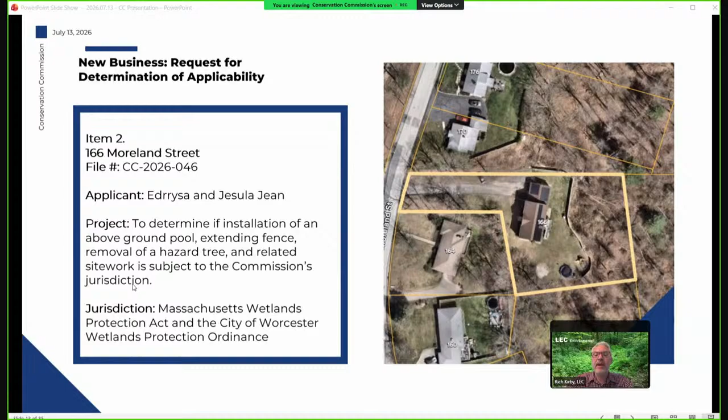Go ahead. I'm representing the owners of 166 Moreland, as depicted here in the image. And I do have the sketch plan ready to go. If I could share my screen, or you can do it there. Perfect.

Jesula and Edrrysa Jean would like to install an above-ground pool in the side yard of the property. This is a view of the sketch plan. It's a limited frontage lot with a driveway that extends easterly from Moreland Street and accesses the single-family house with the attached garage. There are bordering vegetated wetlands in the back, denoted with the orange line there.

LEC flagged those a couple of years ago. The approximate 15-foot no-alteration zone is the red line. The house is surrounded by lawn and landscaped plantings. The pool is proposed on the side of the house, shown as the blue rectangle. There's also a pool deck proposed on the west side of the pool.

The pool itself is 16 by 32, above ground, and the deck would be 10 by 16, again on the west side. The side yard has a bit of a grade to it, and of course the pool needs to be installed on relatively flat land. So what they'll do is take the higher ground, to the left or west, and grade it flat, pushing that material to the east to infill the lower ground, thereby making a relatively flat surface to accommodate the proposed pool.

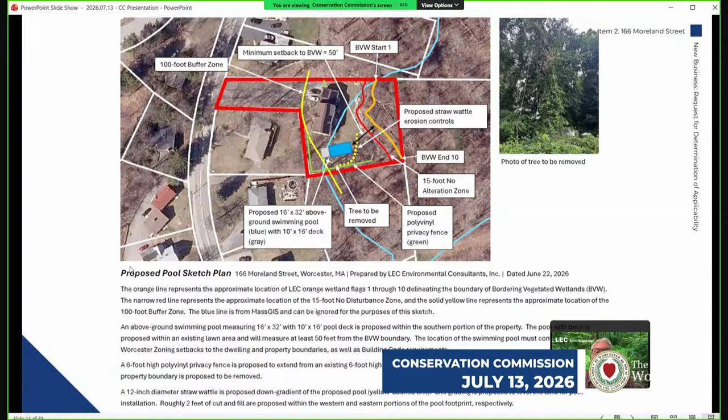That is a great question. There is limited space if you look on the driveway as you come down, and if the machinery were to turn right in front of the house, there is space to get a small sort of Bobcat-type machine through there. I can't imagine they're going to need anything significantly larger than that, but if you wanted to condition that only small machinery be used to move the soil around to create the flat area for the pool, I think that would be just fine.

Okay, and then I know you're addressing the dewatering, but are there specific instructions or methodologies for draining the pool, should it be necessary? It's hard to imagine them draining it in any way that wouldn't impact the wetlands because they're surrounded.

Sure, also a good question. In our experience, the chlorine used in these pool systems, if you don't add it for several days or a week, depending on how sunny it is, dissipates, and the chlorine levels drop pretty significantly. At that point, it would be safe to dewater the pool. And really, at that point, all you're concerned about is erosion.

So a slow release of the water. You could also put down a piece of plywood or something to dissipate the velocity as it flows over land. The water is going to travel toward the wetland to the east regardless of where you put it on this property, because the entire property slopes in that direction. But usually, if you are going to lower the level of the pool, it's going to be at the end of the season, and at that point, you've stopped adding chlorine, and the water is relatively chlorine-free.

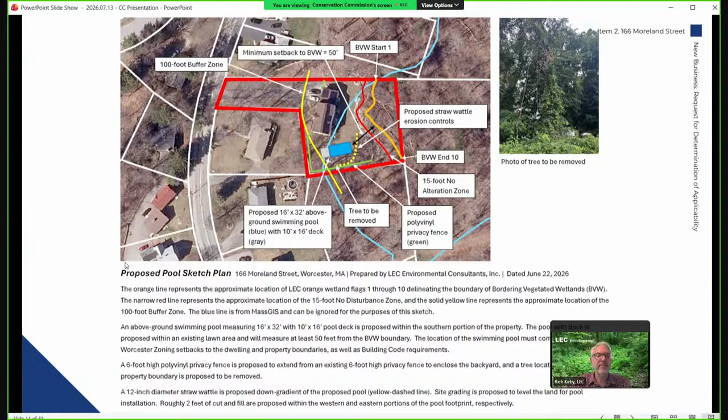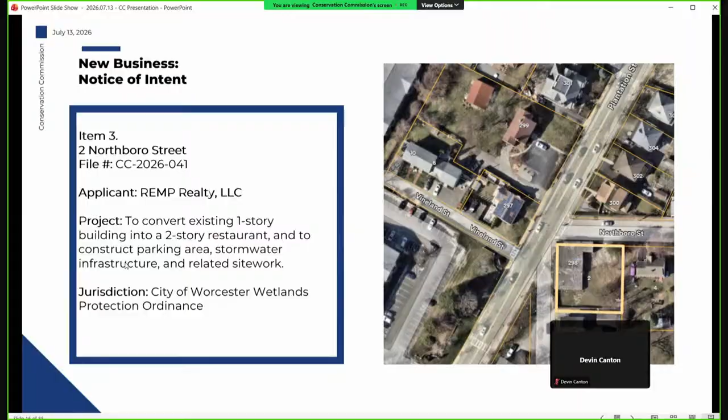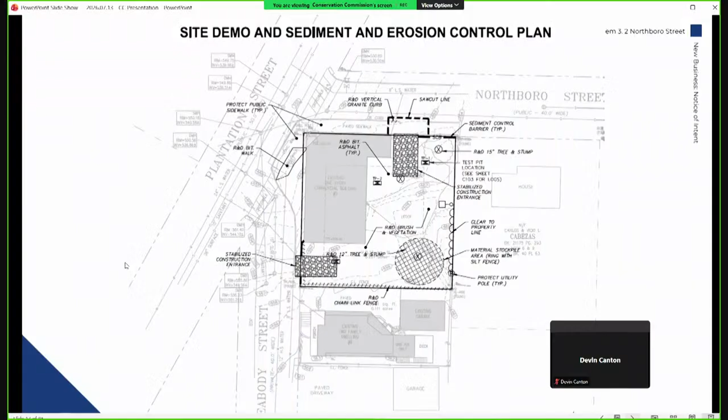Good evening, Mike Andrade with Graves Engineering. With me also tonight is Mr. Rod Haddad, owner of the subject property. So we're here before you on a piece of land on the corner of Northboro, Peabody, and Plantation. It's an existing quarter acre property with a 1-story, 3,000 square foot building on it.

The project proposes to renovate the entire site and building, adding a second story, renovating the site to add new curb cuts, parking, lighting, landscaping, and stormwater management, to house Mr. Haddad's Napoli Deli business, which is currently operating in Shrewsbury.

The property's been in his family for many years. It was previously a dry cleaner operation, closed for a decade or decades or so, I think - the dry cleaner's been closed for a long time. Well, it was a satellite, they only did shirts and laundry on the premises. Not that important, but it's been not open. I apologize, thank you, Rod. It's been closed and vacant for some time.

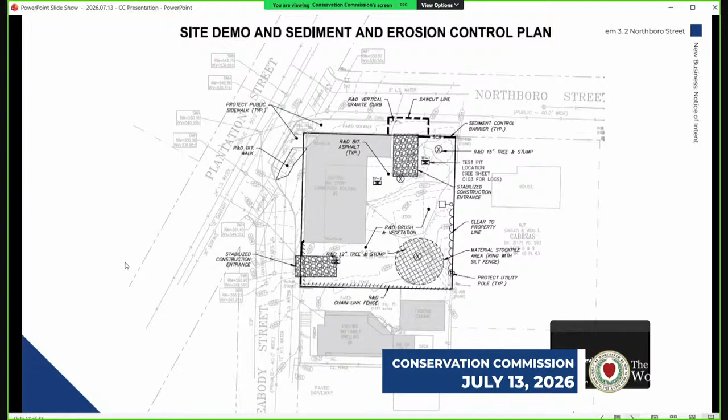There's been, in past years, several attempts by Mr. Haddad to get this project off the ground with different iterations that weren't successful due to contractor issues. But we're here tonight to propose this project to the commission under the local wetlands protection ordinance. We've been through zoning board already and have those approvals, so we're seeking commission's approval and then planning board Wednesday night. I'll take any questions anyone has.

Thank you. Okay, thank you. Staff comments? So this is a local-only filing, no wetlands associated with the property, but it's within 100 feet of a catch basin over on Peabody Street. Staff had relatively minor comments - we did have questions about the ledge on site, which was answered in the response. Essentially, the stormwater system is designed with knowledge that there is ledge on this site and is designed to provide the required recharge volume. So no major concerns from staff at this point.

Okay, commissioners, questions or comments about the project?

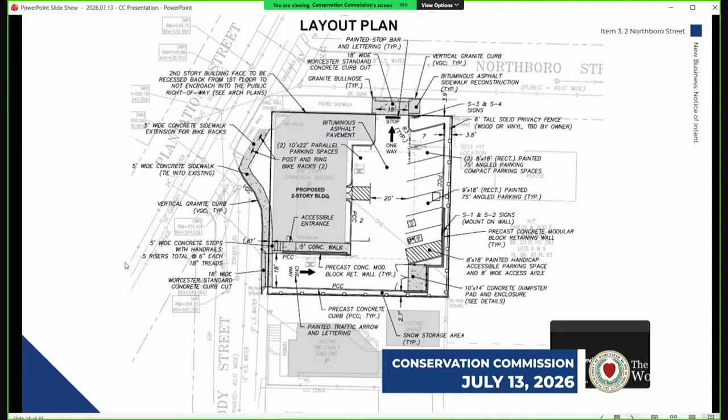The site's relatively flat, not actually. The high point is in the bottom right corner, where we're proposing a stockpile. That's the high point. It slopes down to Peabody Street and then slopes down to Northboro Street. Right now there's an existing parking lot off Northboro Street where the stabilized entrance is. That's the only real flat part besides the building. So the current water is sheeting towards the street.

So the parking lot will roughly follow existing contours. We have to cut into it a little bit. We're collecting all that water in two points: one near Northboro Street with a catch basin that goes to a treatment unit in the underground recharge system, and a small portion of the parking driveway on the south side of the building goes to another catch basin treatment unit and out to Peabody Street.

So you're not doing much to change the contours of the property from the current, other than that? In the back corner we are, and actually there's a retaining wall necessary in order to do that grading, but we're trying not to. We're aware there's ledge there, so we were very careful about that with the grading to try to minimize ledge removal.

Okay, I don't have additional questions. Is there anyone from the public on the project? Online?

Is there a motion? Motion to close. Commissioner Canton? Second. Commissioner Canton, aye. Commissioner Kirschner? Sorry, I was muted. Aye. Commissioner Nystrom? Aye. Commissioner Fertoni, aye.

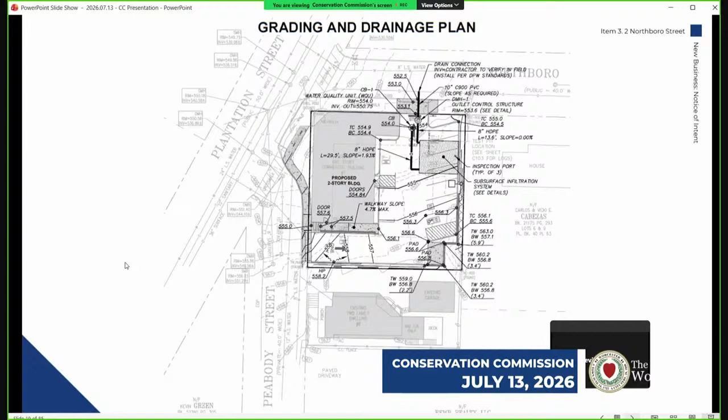If you can unmute Andrew Keel, he's going to kick us off. You could introduce yourself in the meantime. Sure, he was going to do all the intros, but Andrea Kendall with LEC, Environmental Consultants. Did you receive that presentation that we sent late in the day? Okay, great, thanks.

Hi everyone, I'm Andrew Keel with Hatch. We are the design consultant for the Lake Park Site Improvements Project. The client is the DCR. The DCR project manager, Joey Silvera, is also on this call. And then the permitting consultant for this project is LEC, and Andrea is sitting in front of you there.

The goals of this project, quickly: it's a two-phase project. What we've submitted to you tonight is phase one. The ultimate goal is to permanently close the inaccessible swimming beach currently at Lake Quinsigamond and replace it with a safer, reimagined lakefront overlook experience. The first phase would still have a water element redirected up to the parking lot in the form of a spray deck, paired with a playground, and a more family-friendly, safer, more universally accessible space at the top where the parking lot is currently, adjacent to the bathhouse.

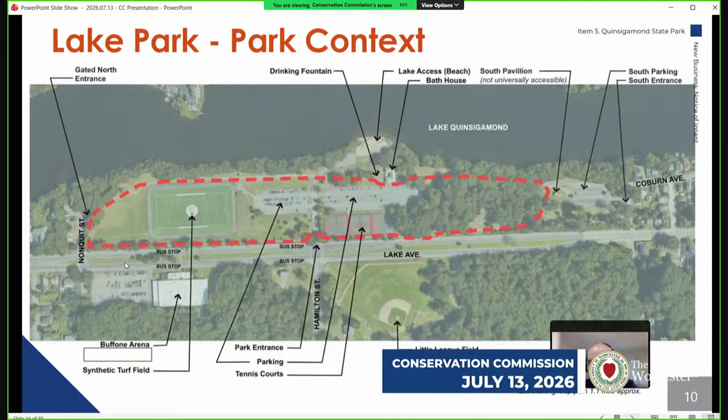So here are the two phases I was just mentioning. Phase two has a bit more to it. It made sense to break them into two phases. Also, financially, DCR is trying to do as much as they can but bite this off in pieces. Phase one is outlined in yellow—the lower, south end portion of the parking lot, immediately adjacent to the bathhouse. You can see there's a little piece that extends down to Lake Ave that would be a smaller secondary pathway connecting Lake Avenue parking with these improvements as well. Go to the next slide.

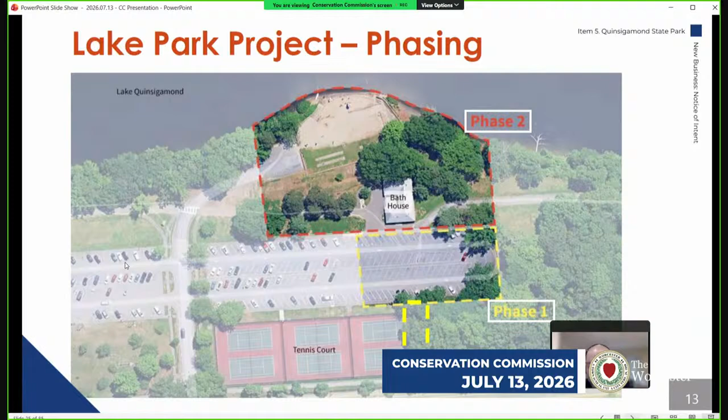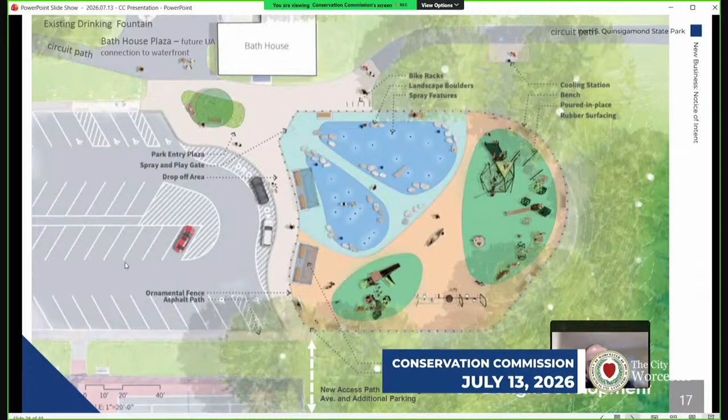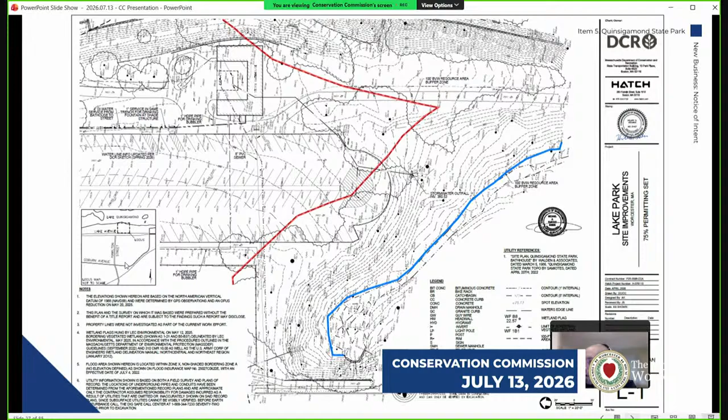Andrea's going to talk about the resource areas and where they overlap on the existing conditions plan. The area confined in blue is the bank of an intermittent stream. There's a stream that flows onto the property from the city's Lake Park, located planned south of here. It flows planned north through a narrow stream channel, then further right opens up into more of an open water BVW system, and exits through a raised grate culvert system, which has some function of flood control, discharging through a pipe conveyance system to Lake Quinsigamond.

The 100-foot buffer zone is in red, and that buffer zone includes the upland forested slope, some lawn area, an existing drainage outfall to the right of the circular tip, and some of the parking lot. There's also the stormwater protection zone.

That intermittent stream, confirmed through StreamStats, has a 0.18 square mile watershed. There is no floodplain associated with the site. In terms of vegetation, it's a mix of native and non-native species, which comes into play a little later - we included a list of that, and Andrew's going to get into that in more detail.

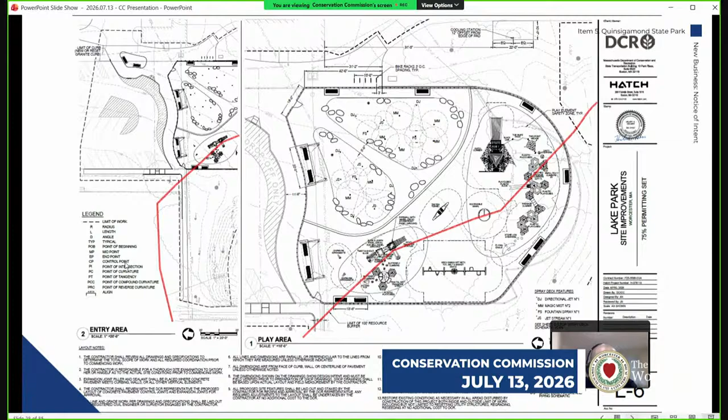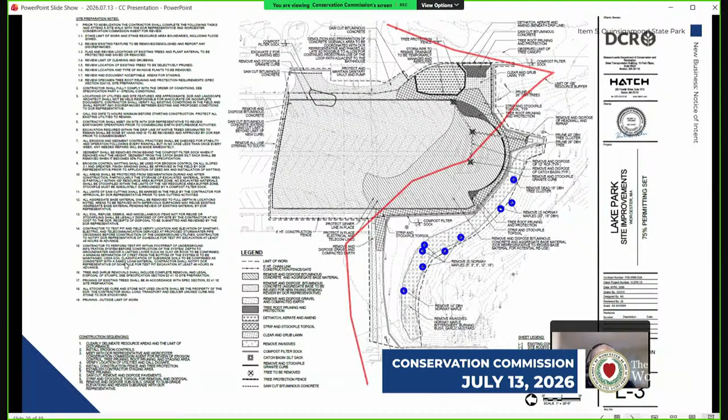We can go on to the next slide.

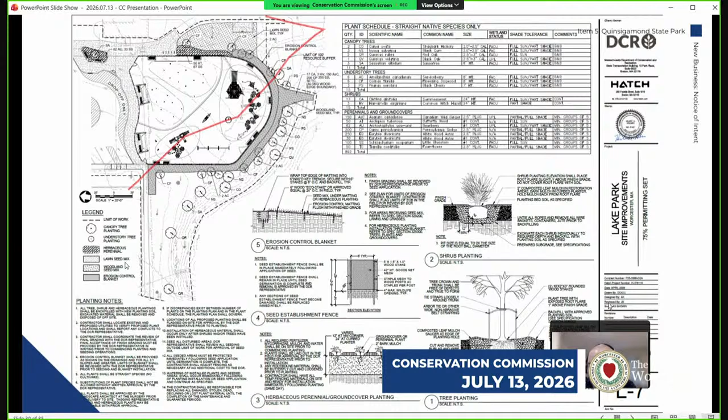What we're proposing is basically to replace that in the exact location it is now, so it's almost more of a repair, limiting disturbance as much as we can. Unfortunately, the pipe size currently there is not adequate by today's Massachusetts standards, so we do have to replace the pipe and the head wall. But because we're doing it in a location that already exists, we can really minimize disturbance along that corridor.

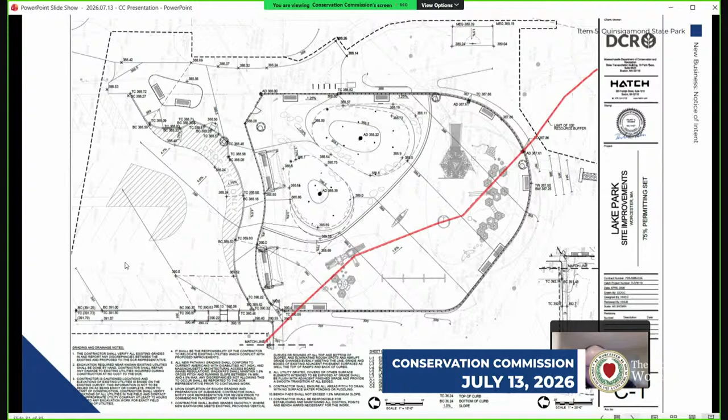We can go to the next slide. This is the drainage improvement slide. Hillary Holmes is our stormwater engineer on this project. She's going to talk briefly about the stormwater approach.

Hi, Hillary Holmes with Hatch. As Andrew mentioned, the existing parking lot and surrounding area has a couple catch basins with piping that goes to that outfall. There's really no existing treatment or infiltration happening on site. So part of our proposed compliance for stormwater is to comply with the Mass DEP stormwater standards and DCR's redevelopment and water quality treatment requirements.

Our approach is to retain 0.8 inches times the impervious area, have our proposed peak flows less than our pre-development peak flows, and reduce the total suspended solids by 80%. This project is also within DCR's priority watershed, so the intent is to maximize stormwater treatment and pollutant removal. There's a TMDL for total phosphorus reduction, with no specific target, so we are targeting to remove as much phosphorus as possible.

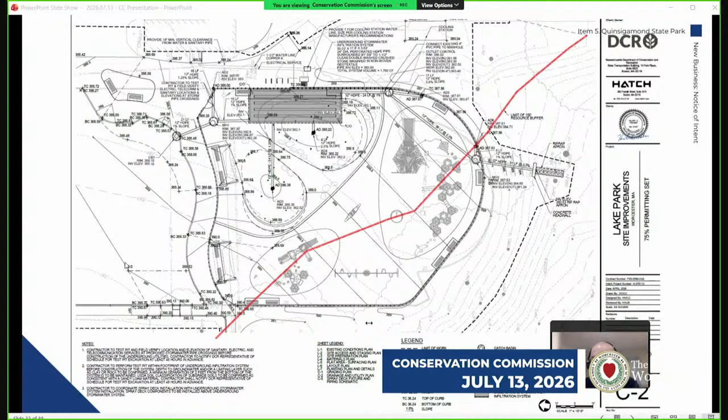Motion to continue the hearing to August 3rd. Second. Commissioner Canton, aye. Commissioner Kirschner, aye. Commissioner Nystrom, aye. Commissioner Fatoni, aye. Okay, thank you.

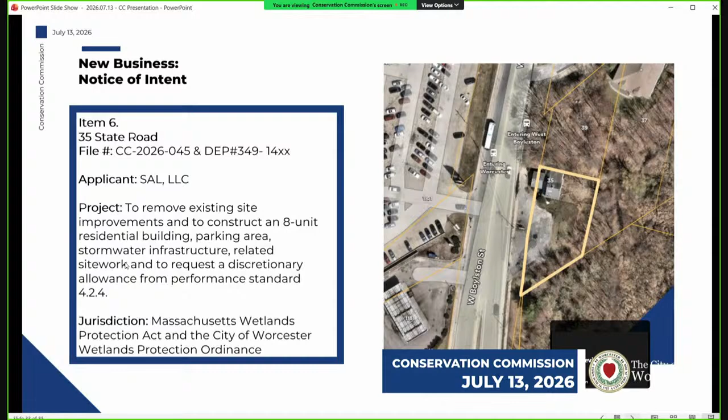Good evening, I'm Paul Linkarski, my wife Susan, the owners of the property. Today existing is a small two-story retail building which we've owned for some 30-something years. Our plan is to remove that building and build 8 one-bedroom units, with 16 parking spots in compliance with Worcester's zoning. Today there's approximately 14 existing spots.

The existing building today is on a septic system; we will be going onto the sewer system. We do have city water. We will be eliminating gas service to the property under Worcester's stretch code for compliance with the type of building it has to be. We will be putting in underground water retention for the parking lot and the roof drain system, plus accessory landscaping, etc. That's pretty much it.

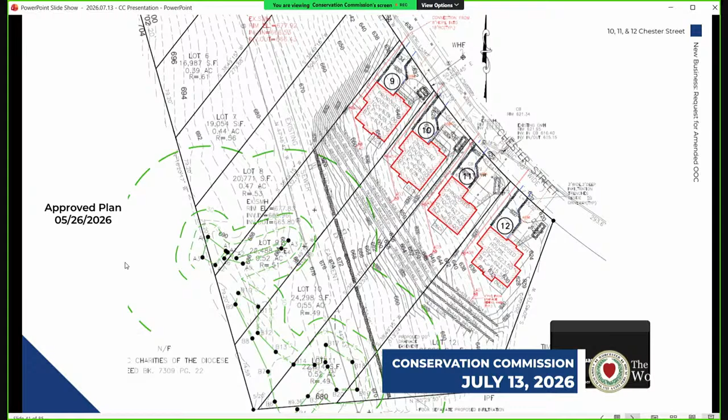So what we have before you now is a plan dated - I have to go check - May 26, 2026, which we would ask to be referred to in the order. I could just sum up quickly a couple of the differences. As part of the review the director of engineering did, he asked us to have a geotechnical engineer opine as to the stability of the slopes behind these lots.

That geotechnical engineer took some samples and said you would want to have a slope of at least 2.6 to 1 or flatter to be able to say that you were going to not have any issue, according to the standard methodology and calculations, with any of the 6 different modes of failure that were looked at. So the plans now show a 2.8 to 1 slope behind these lots.

We actually made the backyard a little smaller on a couple of them to fit that in there. There's still some retaining wall, particularly on the northmost lot, number 9. And we had another engineer stamp plans for that.

In its basics, it's not so very different a plan from that which the commission previously reviewed, but a lot of the minor specifics, exactly what the slope is, exactly the extent of walls, et cetera, are different. We're just asking that the commission please amend the order to now refer to this plan dated May 26th.

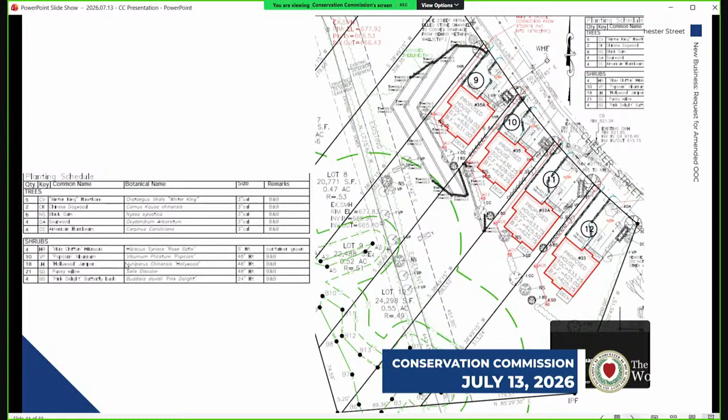Yeah, I mean, I think we'd certainly recommend additional plantings within the buffer zone as much as possible on that hillside, just because of the loss of tree canopy that's there, in addition to wildlife habitat. I think one of the main things here would be to help prevent erosion. I would think also it would be beneficial to the down gradient structures to have more vegetation between these wetlands and their properties, to have additional attenuation of runoff down the hillside.

But yeah, I guess from a regulatory standpoint, no major concerns with the amendment request. Okay, thank you. Commissioners, any questions, comments, or concerns?

If I could jump in, I was consulting with the applicant, and he suggested, towards the end that Eric is pointing, having different ground cover, ivies, et cetera, planted on that slope to help out. They certainly have no objection to any condition calling for that.

My concern is for the runoff to the street during the construction process, how you're going to control it. I assume that you'll go in and clear cut the entire hillside and then start making your cuts and grade changes. You will have a construction entrance, you'll have equipment coming and going, and even if you have erosion control along the downside.

We actually added, I don't remember where in the process this came in, the interim grading plans, which are calling for, even if over that entire limit of work trees are cut, that, for instance at the start, the stumps would be left in place and a temporary settling basin created at the upper lots.

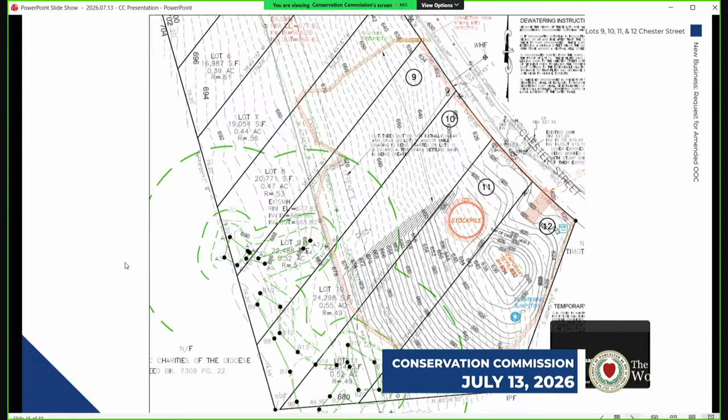What's your time frame for this project? We're hoping to get the first 4 houses done, hopefully by the beginning of next summer. So from the time you clear cut the lot, what's the timing until the lot is finished? Normally it takes us 6 months to do from lot clearing to the finished house, per house.

And then the slope is stabilized or seeded with currently just a grass mix? Yeah, and seasonally, if there's an area that's open and can't be vegetated through winter, we'd apply cover, like stump grindings, as the preferred temporary mulching stabilization. You'll really mulch it. That's the best thing.

And you're local? Yes. Okay, so you can respond on this site? Are you the general contractor for the project, or are you? Yeah, I am the general contractor for the project. So you're responsible for all of this? Yes.

Okay, I don't have any additional questions. Is there anyone here from the public?

Just going back to the slopes question quickly, I think you call out on the plans erosion control matting, correct? Is that during construction? Yeah, even though at 2.6 to 1, or 2.8 to 1, we're almost to the point where DEP would say you don't need it, we're still proposing that be North American Green SC 150BN matting.

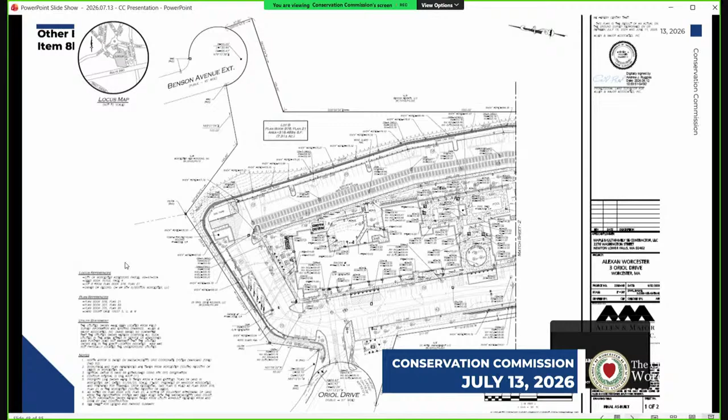Next up, request for certificate of compliance, 3 Oriol Drive. This is for a large apartment complex that was constructed; it was a local-only filing, and there were no wetlands associated with the property. Staff conducted a site visit last Friday and confirmed the site is fully stabilized. An as-built plan has been provided, along with a letter from an engineer confirming the retaining wall and infiltration units have been constructed according to the approved plans. So no concern from staff with issuing a certificate of compliance for this site.

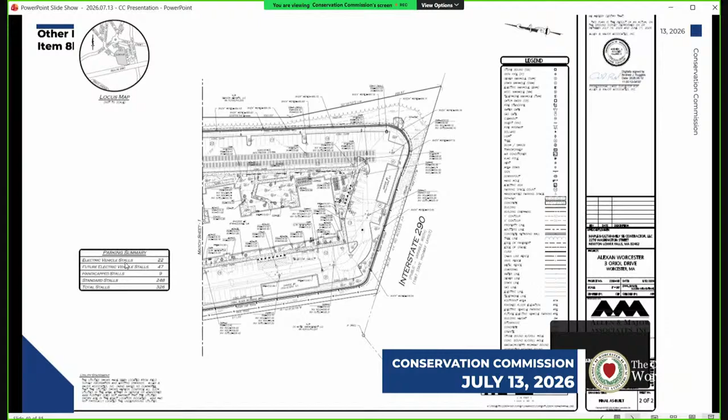Is there a motion? Motion to issue the certificate of compliance. Second. Roll call: Commissioner Canton, aye. Commissioner Kirschner, aye. Commissioner Nystrom, aye. Commissioner Frattoni, aye.

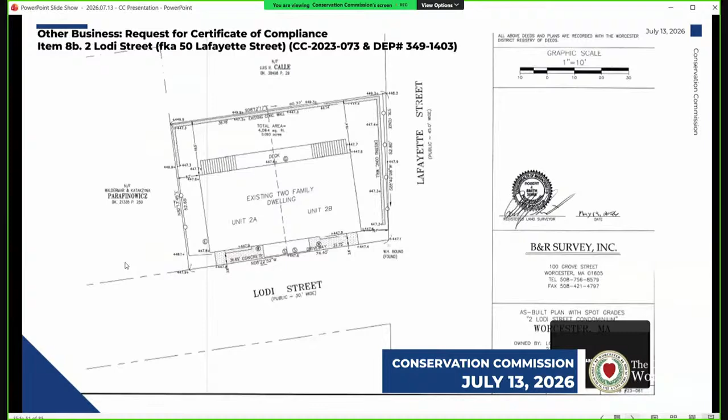Next, 2 Lodi. Sorry to interject, but we just had a request to take item number 9G out of order, as the consultant has to head to another meeting shortly. So if the chair is amenable to that, do we have anyone online for the other certificate of compliance?

70 Webster Street is here. Can we just take Webster Street and go? That shouldn't take long. I have a Zoom or phone call with Ashley for a couple of projects at 7:04. That's the only reason I asked. Thank you, yep.

All right, Nick, you should be able to go. Good evening everyone, 70 Webster Street. All the erosion control is still out there until we get the certificate of compliance, but the engineer of record submitted a letter requesting the certificate. There were some minor changes, nothing too crazy: a transformer pad relocation due to the service provider, and the 24-foot aisle on the west parking bank was reduced to 22 feet wide, which is allowed as part of the special permit decision. Associated with those 7 parking spaces there was supposed to be a guardrail; instead there's a 2-foot-high section of concrete retaining wall and a 4-foot-high aluminum fence, which still serves the same purpose. The landscaping was missing a couple of shrubs due to an area that was already well established, so they left it and added more trees. There were 38 trees installed, 33 required, and 43 shrubs installed against 47 required, but total plantings were 81 compared to 80 required. The riprap pad on the southwest of the installed concrete retaining wall had to be extended about 5 feet for slope maintenance and to prevent erosion in that area. That's probably the biggest point of difference, and I know it is a little closer to the resource area. Besides that, everything else was done in accordance with the plan submitted in June. Happy to answer any questions.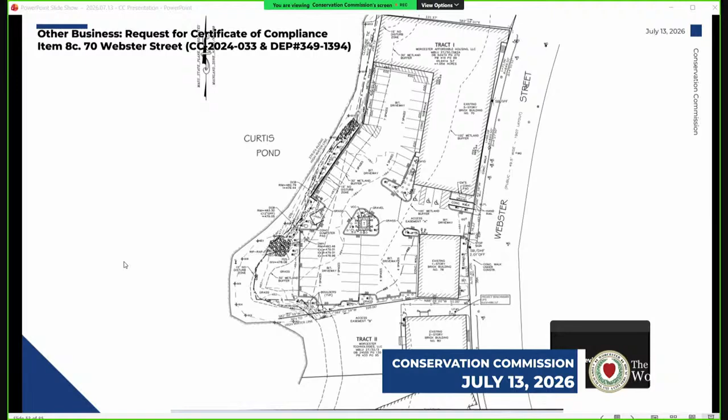Thank you, Glenn Kravosky from EBT Environmental Consultants, and Mr. Chris DiMaggio, who can introduce himself, from Lindis Corp. We're here to answer questions on the last revision of letters, June 18th, from the Conservation Commission, ranging from question 1 to 10. I did find a discrepancy between the plan submitted by Thompson and Liston and EBT: one place references 3 to 4 inch subangular rock in a note at the top of the plan, while the bottom of the plan references 8 to 10 inch rock, 6 to 10 inch rock. We mean the largest rock in the channel we create will be 10 inches, ranging down through the lower grade, and we reference Hinckley soil to encompass the lowest material—8, 6, 5, 4—down into gravel as we create this channel once we remove material from it. So that was the discrepancy: it's not just the 3 to 4 inch subangular rock noted above on the plan, sheet 1 of 3.

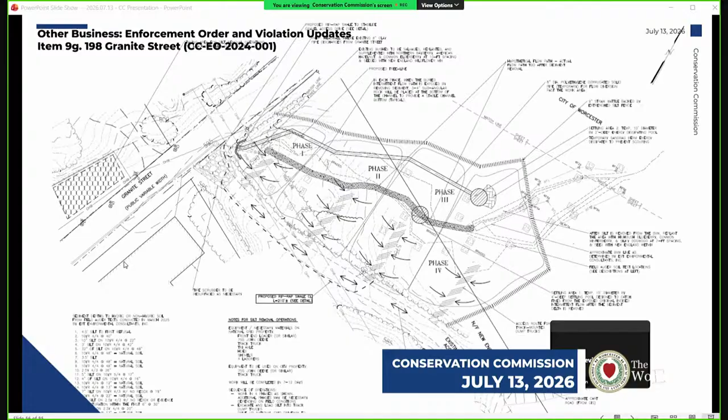We did explain approximately how long it's going to take us to do this work. And we have a staging area across the street, again, for the material. But the material, if we do it during the dry, it shouldn't be mucky. It will be fairly dry even now when we auger down through it. We will salvage any plants that are in that upper wet meadow or meadow, and that would be elderberry and arrowwood.

We'll salvage those, and then talk about augmenting with other plants, both upland plants on the upland end and wetland plants in the center. We still don't expect to have hydric soils when we get down to the original A horizon, which will be our job to ensure we're getting down to. The hose and the handwork we do ensures we leave minimal to no sediment behind, and we're on the original A horizon, which we did auger down to, so we know it's down there.

Thank you for that. Thank you.

So just to back up a little and give the commission a refresher on the overall status of the enforcement order. This enforcement order was issued back in early 2024 related to turbid stormwater discharge observed from the outfall on Granite Street, carried from a pipe through the subject site, across the street at 198 Granite Street. That enforcement order required two main components: one was development of a plan to manage stormwater on site to prevent turbid discharges to the outfall, and also to remove the sediment that had accumulated down gradient, both within the wetland at the location of the outfall and further down gradient on city property.

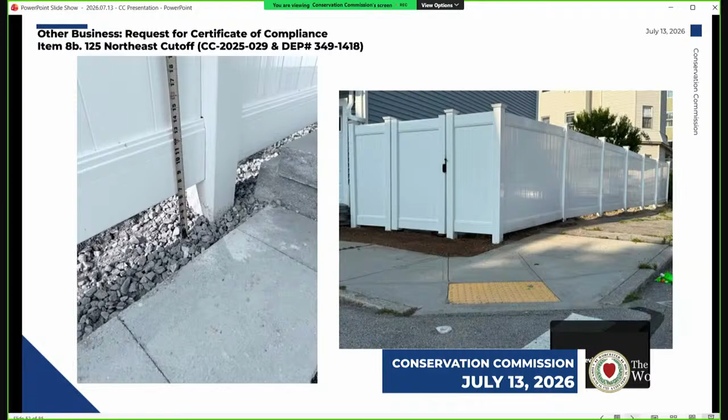Is there a motion? Motion to issue the order of conditions—certificate of compliance. Second. Commissioner Canton? Aye. Commissioner Kirschner? Aye. Commissioner Nystrom? Aye. Commissioner Frattoni? Aye. Are there any other enforcement order updates?

All right, so this is a neighboring property to one of our COC requests that we had tonight. This is at 88 Webster Street. While I was out doing the certificate of compliance site inspection, I noticed that there was some riprap installed along the bank of Curtis Pond here. So we did reach out to the property owner, who is also the same property owner of 70 Webster Street.

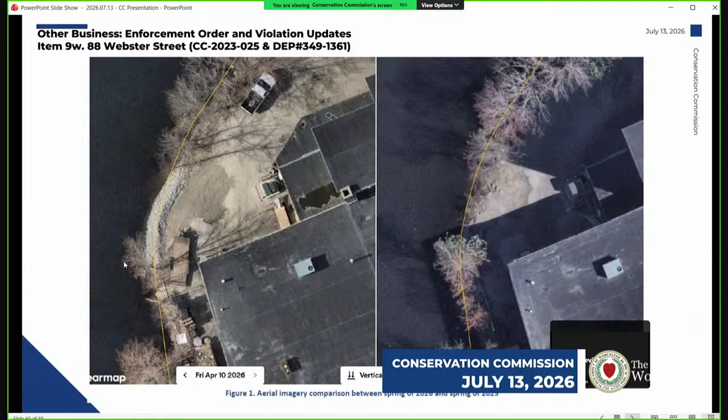We're requesting that they come in to the commission to discuss what their plan was with the bank there. There is an existing order of conditions on this property, but it's for a transformer pad installation. Eric was out to the site back in 2023.

So this is what the bank looked like versus what it currently looks like with the new riprap installed. It's a very degraded bank as is. They did install this riprap, which was within bordering land subject to flooding, and it goes right into the bank and into the water.

So they are going to come and discuss this at our next meeting, August 3rd. The engineer was away this week, so they're going to come in and discuss. We haven't issued an official enforcement order yet, it's just a violation notice, but we want them to come into the commission and discuss what happened.

So we're not voting on an enforcement order? Nope, we're not voting to ratify anything.

And if I recall correctly, the reason for this was because the plows were getting stuck. Yep, this was a winter project they took upon themselves because their plows were getting stuck in this area.

Do we suspect that they were plowing snow into the pond? It's possible, yeah. And since you've been to the site, is it just sheet flow? There was no drainage system on this property? Not that I'm aware of on this one. I don't know where the closest catch basin is.

I think, based on the erosion, it appears that the water is just running off the property down the bank, and over the years has taken the asphalt with it, along with whatever else got to that point.

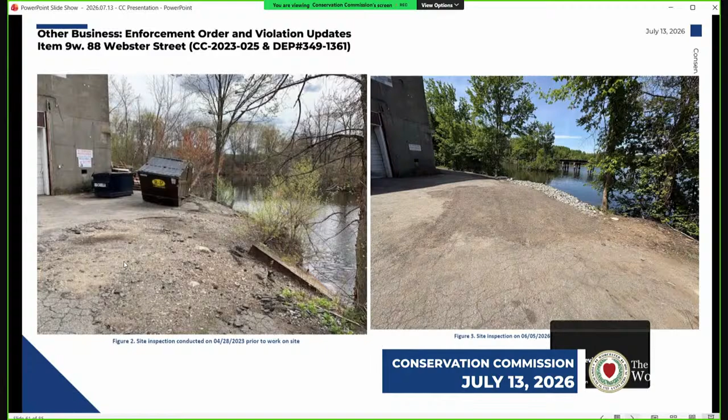Open space: just a reminder that we have a ribbon cutting tomorrow for Brooks Dairy Farm. It's only supposed to be 94 degrees by 5:30 p.m., so come join us, it's shady. We are going to host it. We went out there today to scope out where we were going to hold it.

We'll hold it in the middle of the walking path that connects Romola Road to the Nelson Place Elementary School. It'll be with a backdrop of trees that are higher up to the west, so it should be nice and shady where we meet.

I think the city manager and district councilor and mayor are planning to speak on behalf of the city. Greater Worcester Land Trust also will be speaking. We've invited members of the Community Preservation Committee, since this is also a CPA-funded project. We invited representatives from the land grant program to attend who are not able to attend, but it should be nice.

We haven't done this recently for a new open space acquisition, so we want to get some celebration of the new acquisition, and then we'll have an optional walking tour of the property, maybe depending on the weather. It'll be quick regardless, but Greater Worcester Land Trust did get out there last week to do some initial trail blazing and clearing, so it shouldn't just be bushwhacking through unimproved forest. It'll be actual paths that may not be well trodden down yet, but it won't just be crawling through brush. So if you're able to attend, that's great.